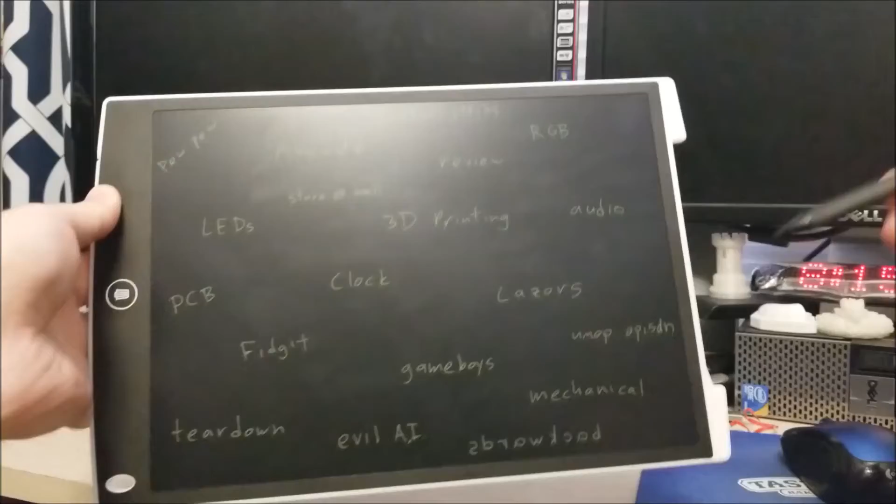I'll close my eyes, and I'll just sort of stab it with the pen. Let's just see what it lands on, and I will do a project on that.

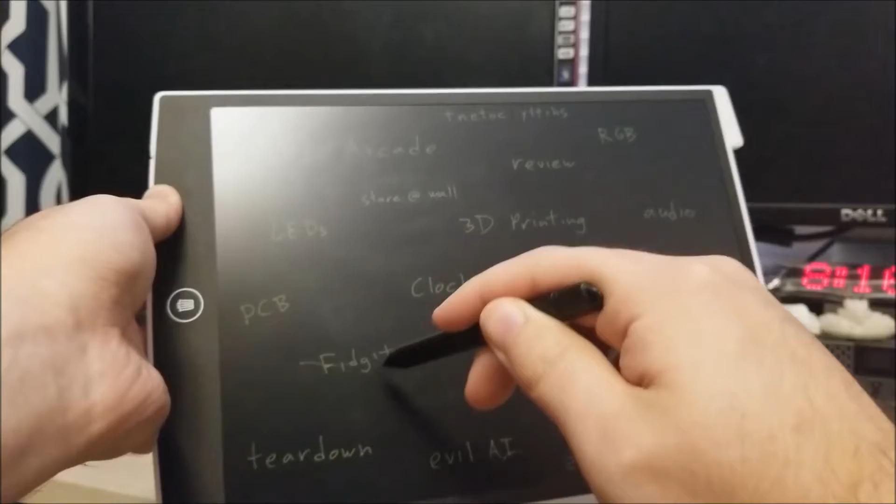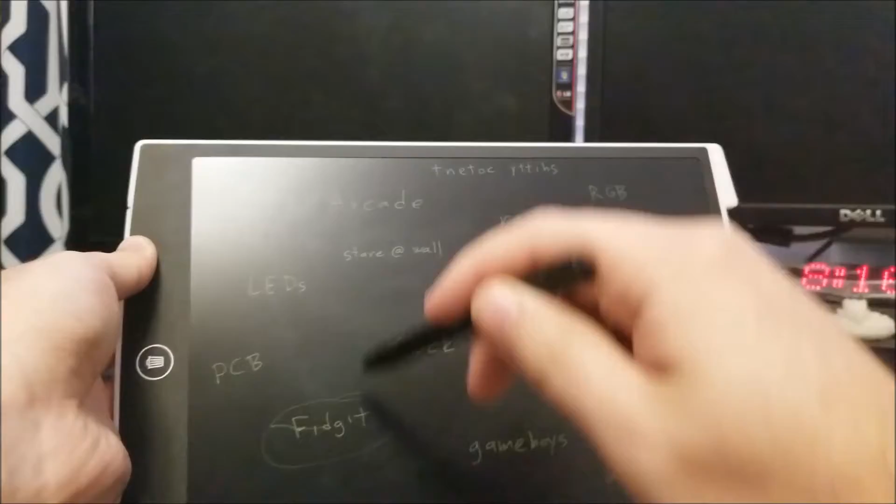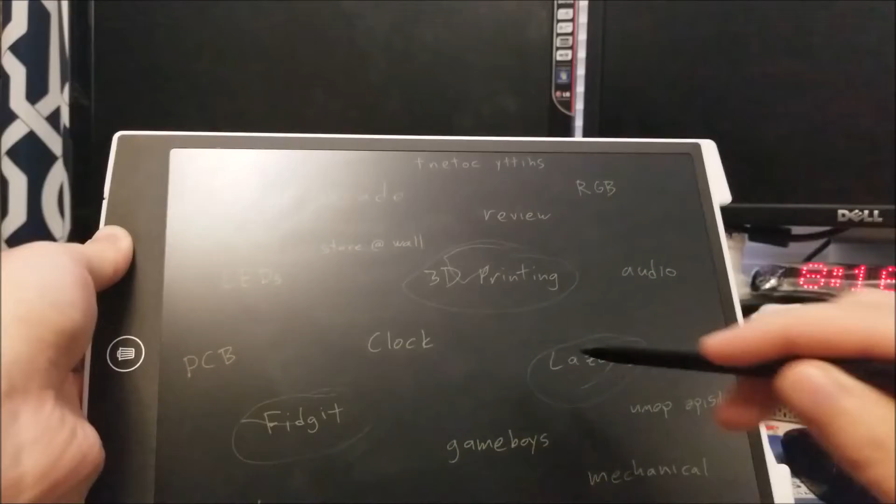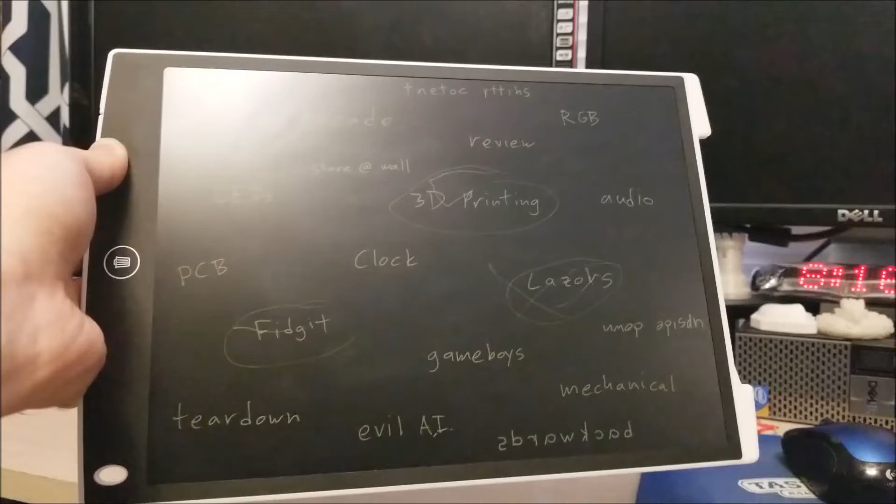Okay, so it looks like I'm making a fidgety something. Fidget laser. So I'm making a 3D printed fidget laser. You know what? Nah, that's kind of stupid. Don't care about the laser part. Let's just make a 3D printed fidget spinner because, well, everyone's already done that about half a year ago, and I'm bored, but I've never done it, so let's just get into it.

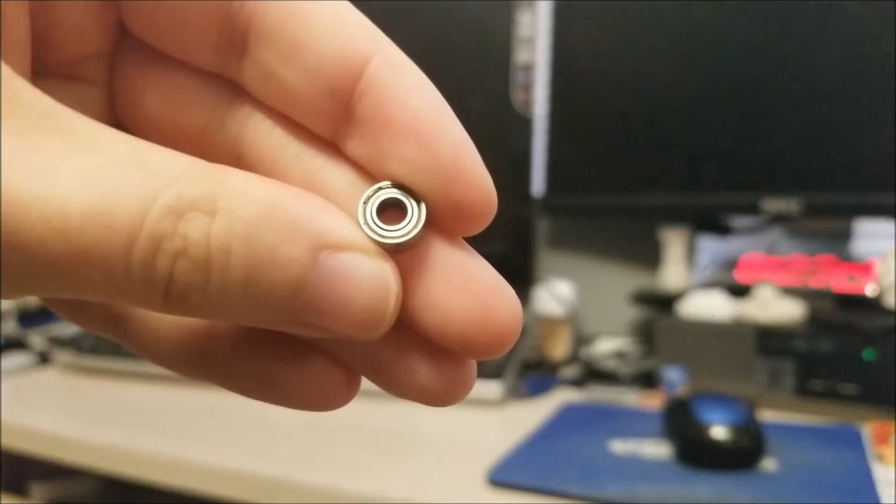Okay, so these are the parts I have to work with. I have this tiny little bearing that I think I pulled from I don't even know what, probably like a VCR head or something like that. I just popped it out, and I have two of these, and these are sealed type little tiny little bearings, and my camera keeps focusing in and out.

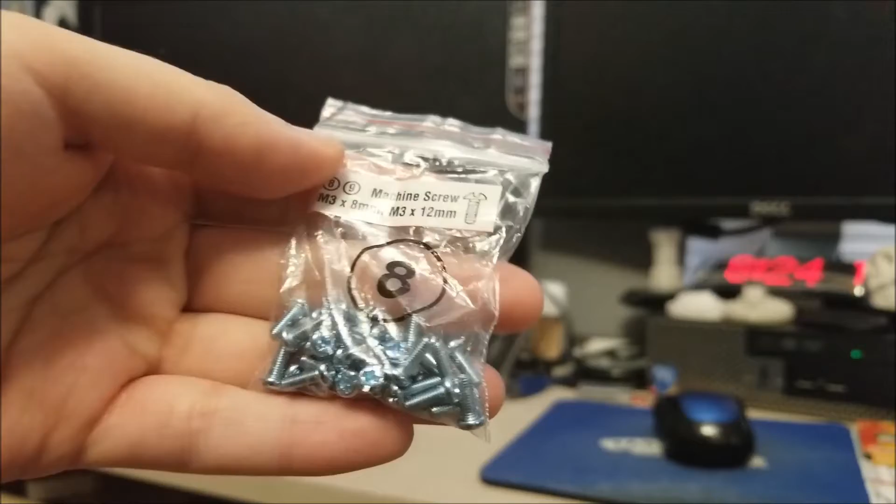Anyway, this should do pretty nicely. I don't know the condition on these. They might be a little worn, so it might not be as good as if I bought one, but that's what I have. In addition to that, I have some M3 screws. Let me just fix the focus so it doesn't keep doing that. So I have some M3 by 8mm screws. These are kind of hefty, so these will add a little bit of weight.

Additionally, I have these guys, which are M3 nuts, basically. So I'm just going to stick a bunch on the end there to weight it down. And if I need a little more weight, I have these washers also, so I'm just going to stick a metric ton of those on, and that'll be adding weight to the arms, and the center will obviously be the bearing.

So anyway, let's just get into it. I'll show you guys the modeling, the 3D modeling of it, as well as the printing, and we'll come back at the end and I'll show you guys what the results were.

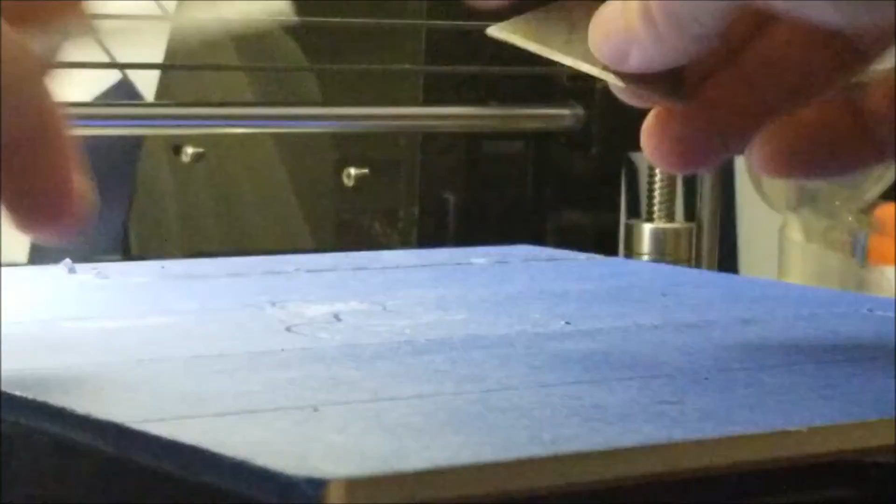There we go, finished. So, how did it all turn out? Well, okay, that was fun. Anyway, basically, I'd shown you guys I added some fancy schmancy text on here that says SGM4306, and kind of forgetting how big, or rather how small this was that I was printing it at.

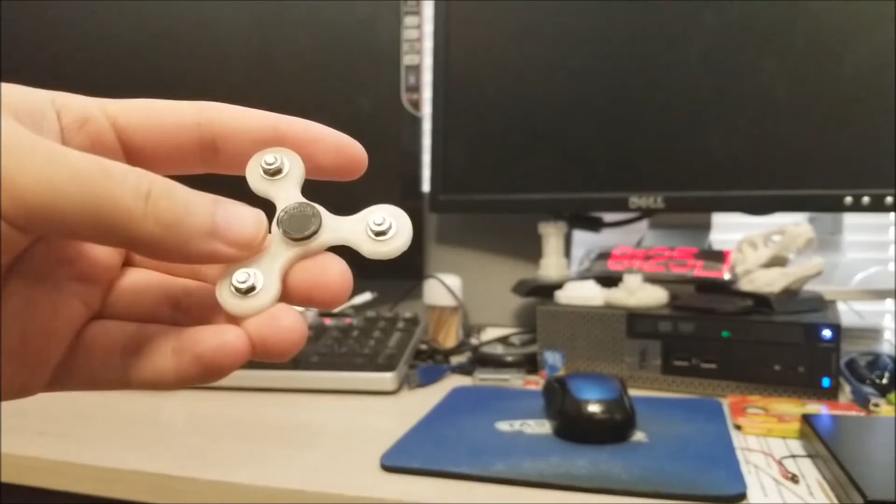So the 3D printer was just like, nope, and didn't even bother trying to print that, obviously, because it would be absolutely minuscule. So anyway, you can see here it is absolutely tiny. Well, not the tiniest thing, but basically it's proportional to the size of the bearing that I used. So yeah, it works. It spins pretty freely.

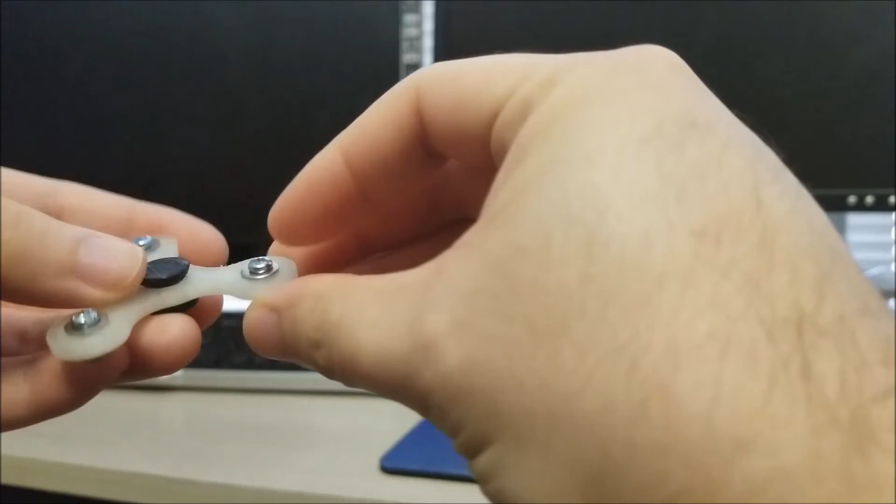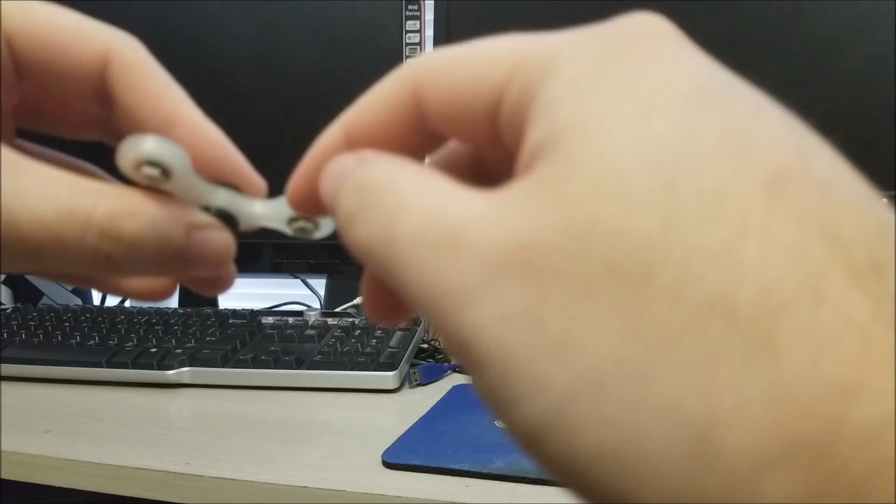So what I ended up doing was printing out hexagon-shaped hexagons inside here. And I fitted a nut inside, and then I screwed a screw with a washer, and then I put another washer and another nut. So basically there are 2 washers and 2 nuts on each side, as well as an M3 screw. And yeah, I had to do a little bit of tweaking to make sure that it doesn't pinch anywhere on the holdy part. And you can see here, it spins quite freely.

I'm just going to sit here and fidget because I'm bored. That looks really cool on the camera. It does not look anywhere near as cool in real life. Anyway, you can see everything works, and it is a pretty small fidget spinner. Pretty sure this is not the world's smallest, but I really don't care. It works. It works.

Spin, damn it. And the cool thing is you can actually blow on it to get it to spin, so let me try. Probably couldn't even see that. I was probably out of frame.

There we go, just a 5-hour version of me playing with a fidget spinner. Anyway, if you guys want to make one, I could put up the files, but you would specifically need the exact hardware, the exact random ball bearing that I found from somewhere that I can't remember years ago.

Yeah, so anyway, fairly easy. The body took about 40 minutes to print. The caps took maybe under 10 minutes, definitely. So all in all, this was like less than an hour project, and modeling didn't take that long too.